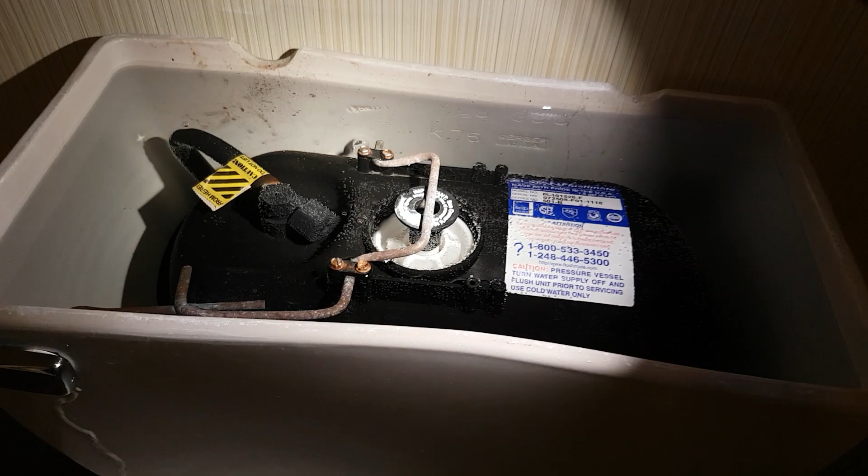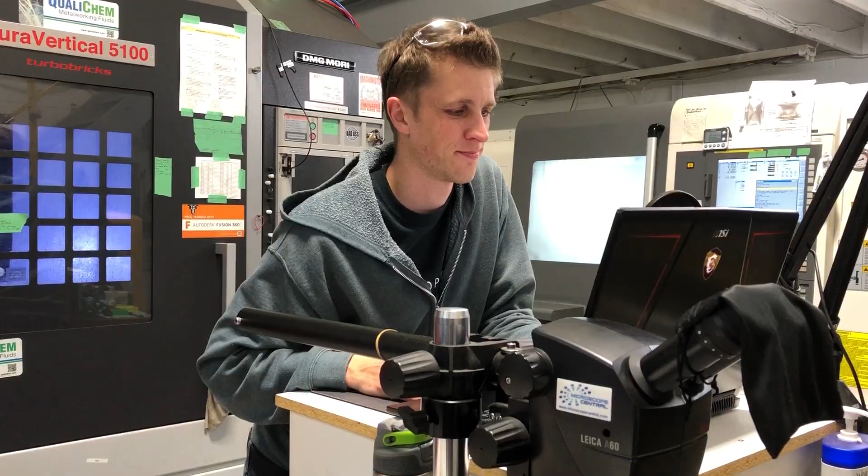So I know it's not my job, but for the next night, this is my toilet. And the ground is soaking wet and dripping. Check this out, I've never seen a tank quite like this. And look how full it is. Something's wrong. I don't get it. That's different. Now, I'm no toilet technician, but there is a towel in there. I did not fix it.

Good morning, everybody. It's cold, but actually really nice out here. It's pretty easy - you just gotta follow the crowd of young guys wearing hoodies.

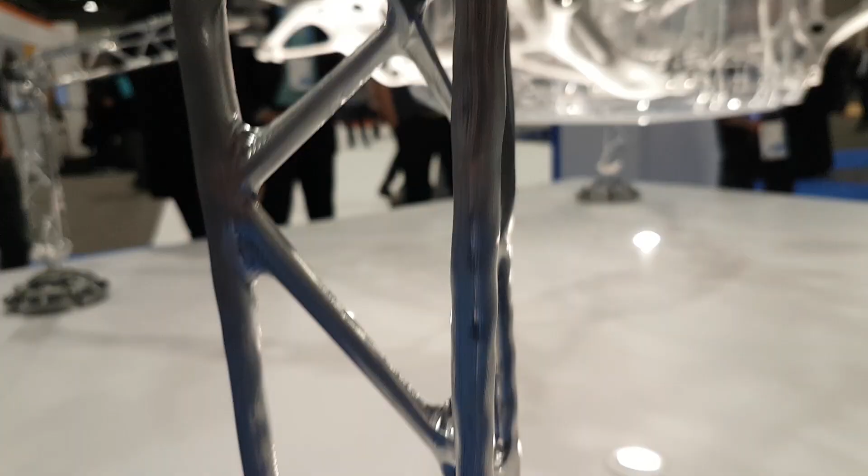I was just checking out the MSI computer booth because my laptop is an MSI, and I think I just found the microscope that Saunders has been talking about since IMTS. Let's go check it out. Weird. Nope, I think I was mistaken. This is like a 3D viewing system.

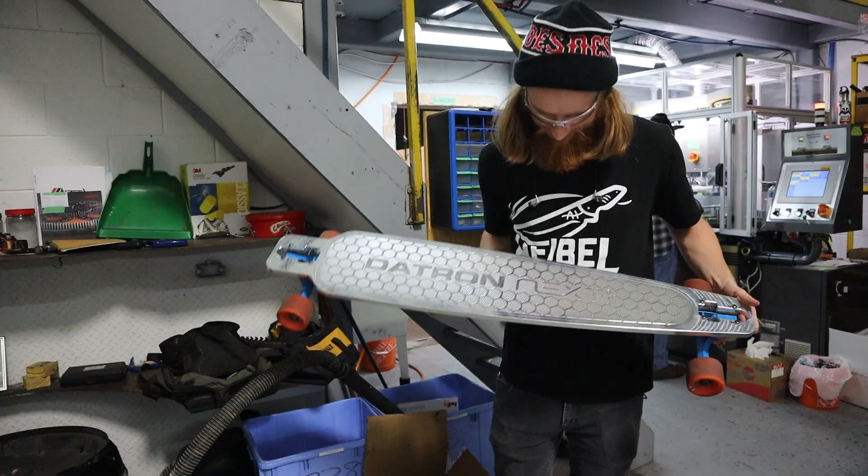So Dan was just at our shop like 3 weeks ago, delivered that sweet long board. I've never actually seen a Datron Neo in person, so let's check this thing out. All right, tell me what to do.

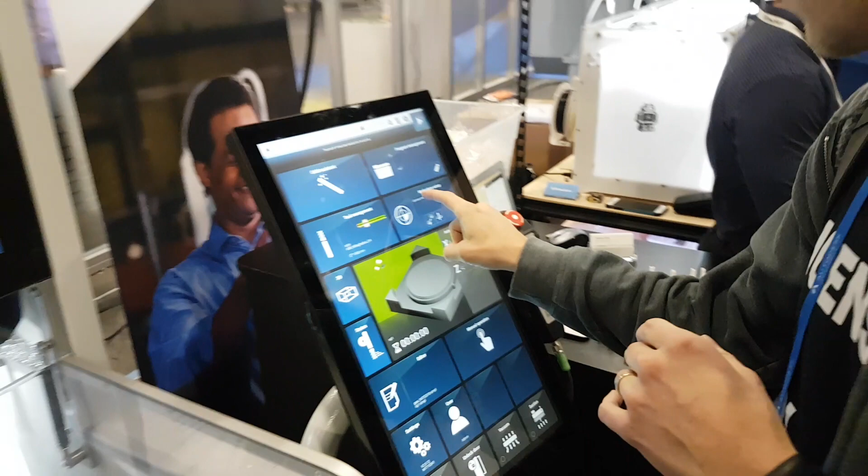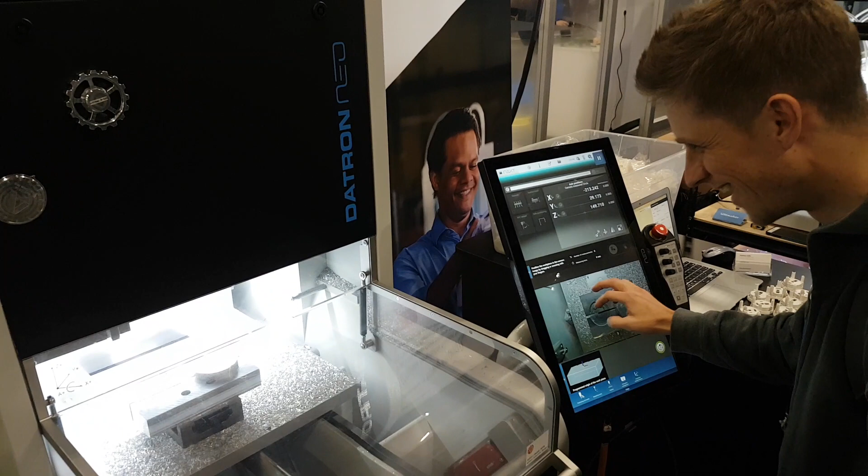All right, so we're gonna go ahead, go to workpiece setup. Yep, I've never done this before. Press right there in the center, drive Z-axis upwards. So we've got a camera on our Z-axis, so it's gonna raise it up to focal length. So I wanna find this piece of stock here on the side. You got it. All right, so the camera is beside the tool.

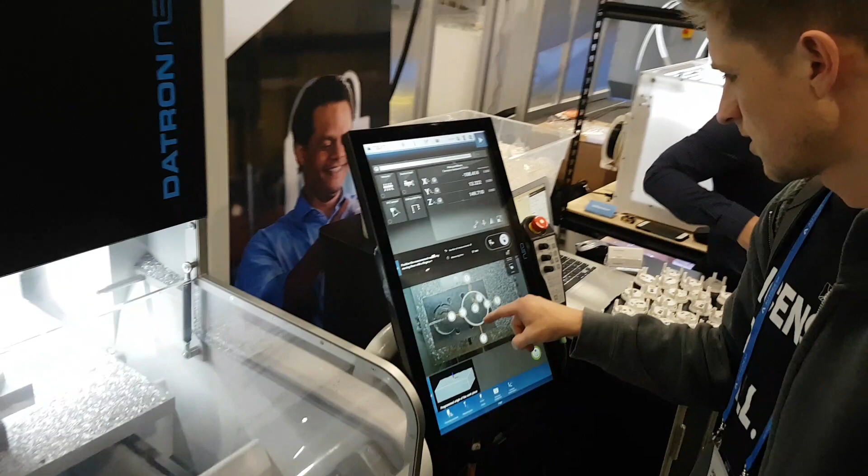Yep, so now we want to probe that. Go ahead and press draw in the upper right hand corner right there. This one here? Yep. And then just draw a circle around the part. Okay. And then you'll see all our probe points come up. Nice, it's perfect. So you drag them where you want them. If you wanted to do the inside of it, you could just drag these points in, out. You could add them, move them around, things like that.

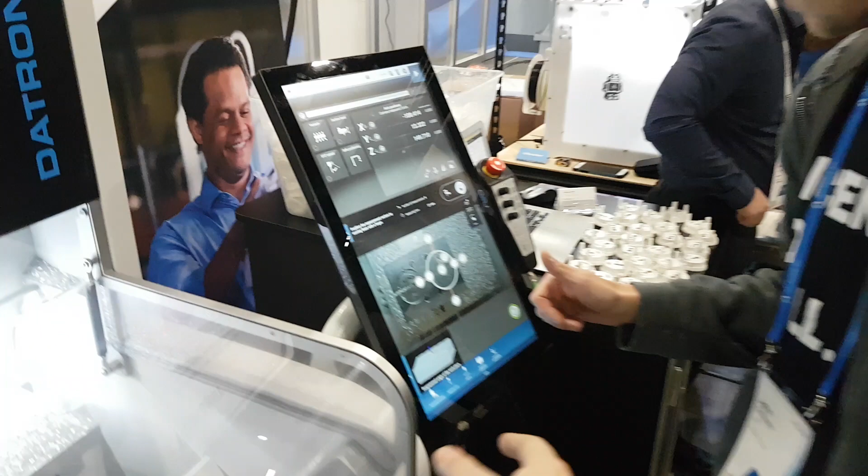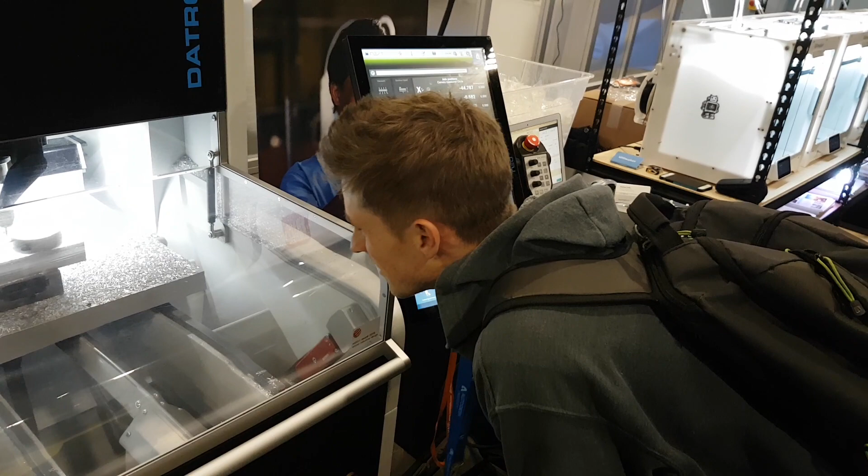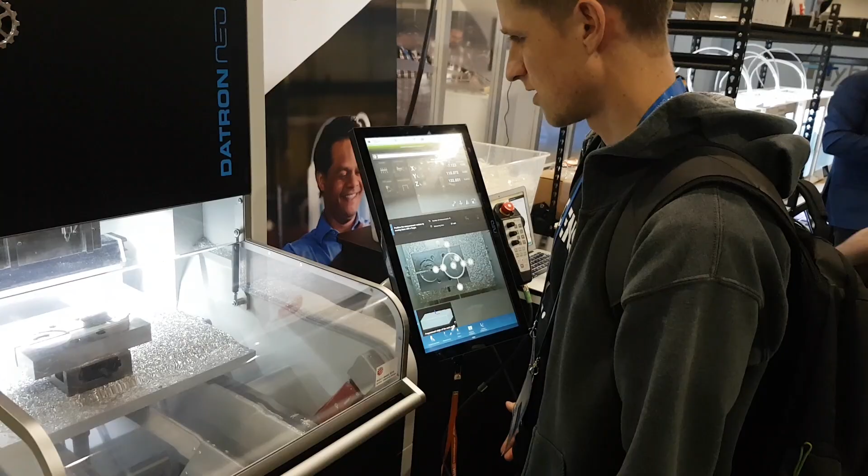Okay, and then if I click this one in the middle? That drags your center. Okay. And then that one point here is just for your Z height. So go ahead and press the green button. Probe comes down. Obviously, so finds your Z height, then it just goes around. Yep, you can customize all the points too if you're using all the pin stock distances. And then we're done. Touch off the tool. Oh, it's like a single flute, right? Correct.

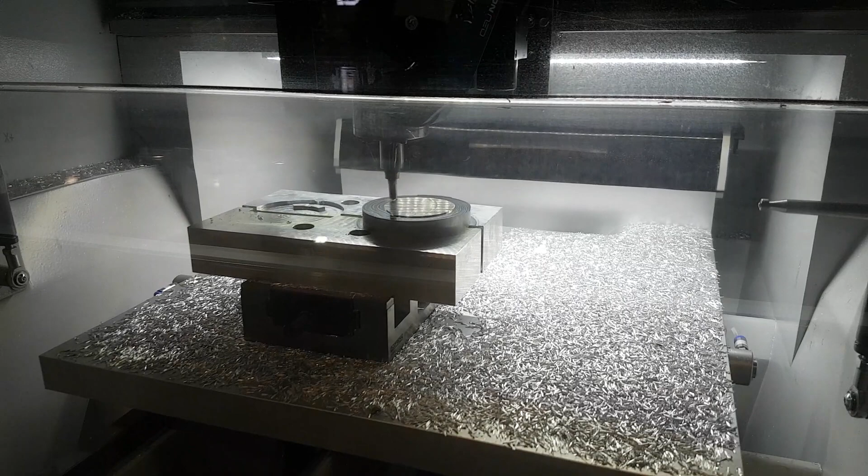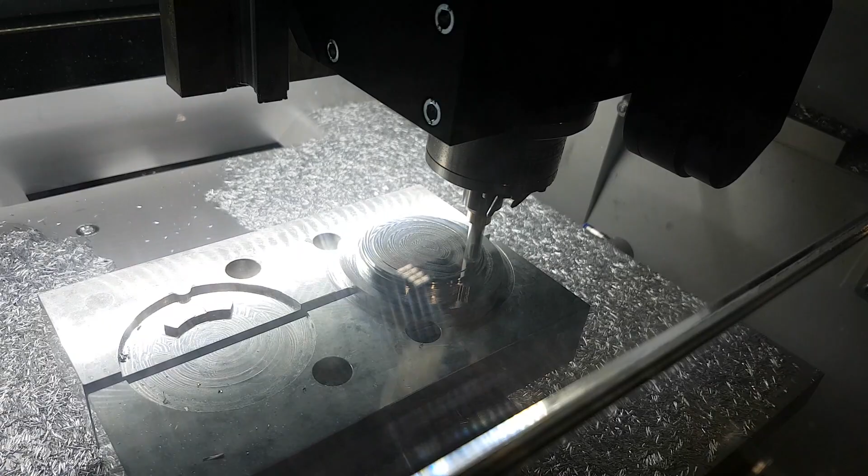Oh, so you just flip it over in the same position. Got a little pocket for soft jaws.

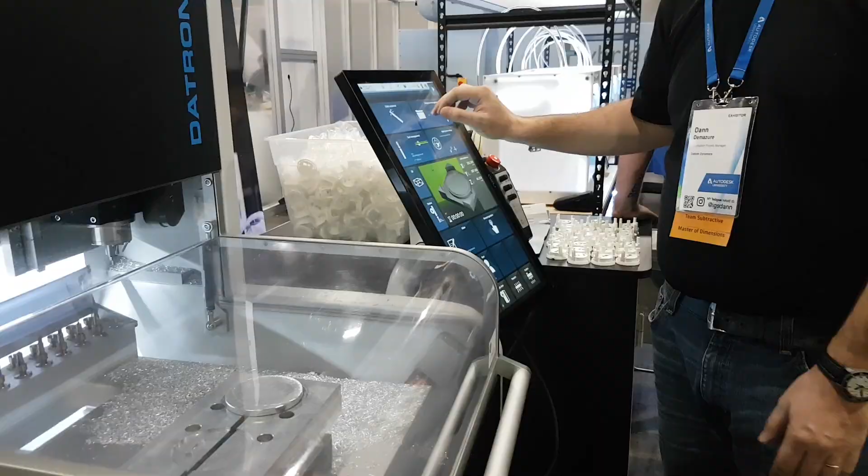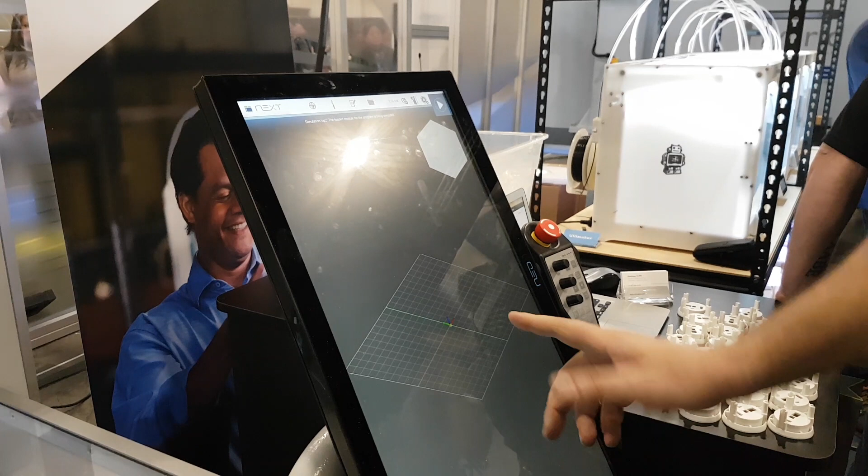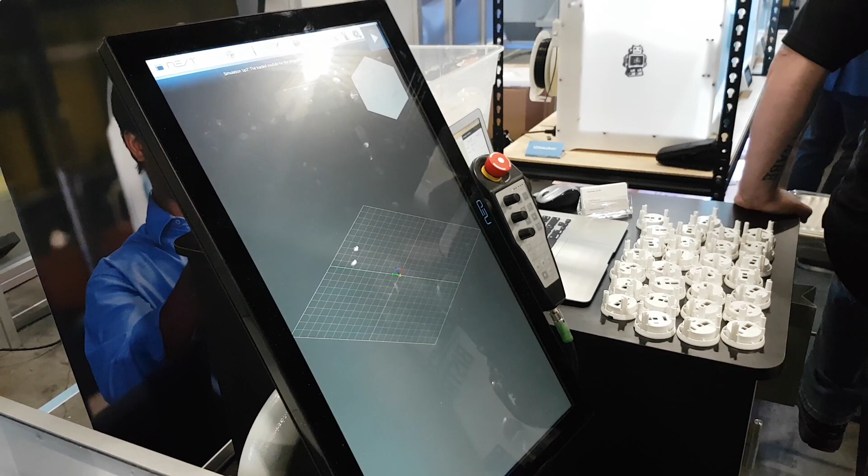Sure, so what's it doing? It's reading the code itself. Exactly - it doesn't carry anything over from Fusion other than what's in the post. Yeah, so just workpiece dimensions and tools. It's a representation of your toolpath, not your model. Yes, so if it's wrong, it's not your model that's wrong, it's something that's in the toolpath.

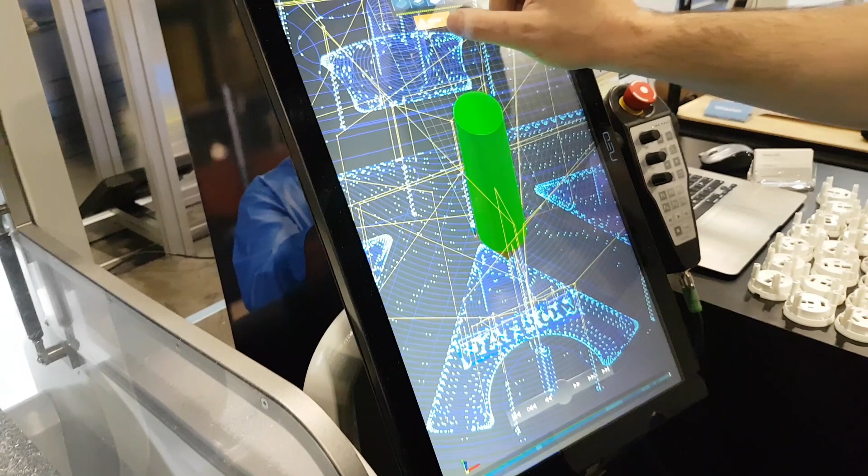So it gives us all the points, all the vectors. Cool, I've never seen this in stock on any other CNC machine.

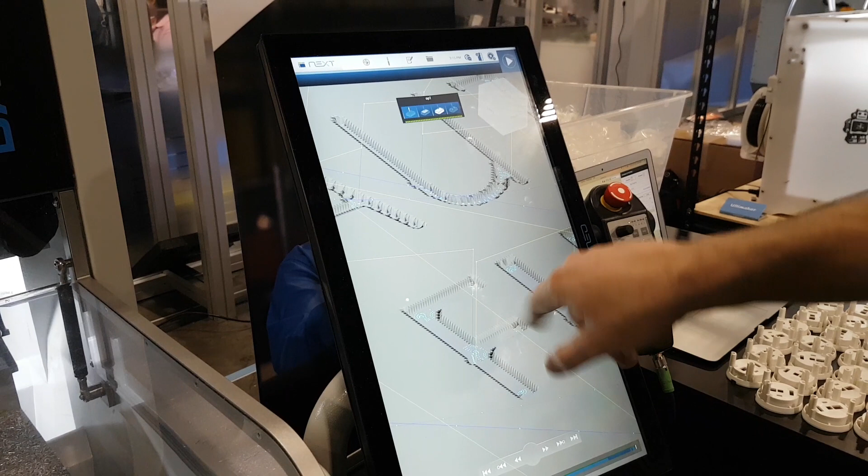Yeah, so we can zoom in, and the resolution gets better as you zoom in, so you can actually get some pretty good details. It will re-render, and look there, we can see from our engraver. There's actually on our M8 Cube or ML Cube, we have this control with 2 PCs, so it can simulate twice as fast and be at twice the quality.

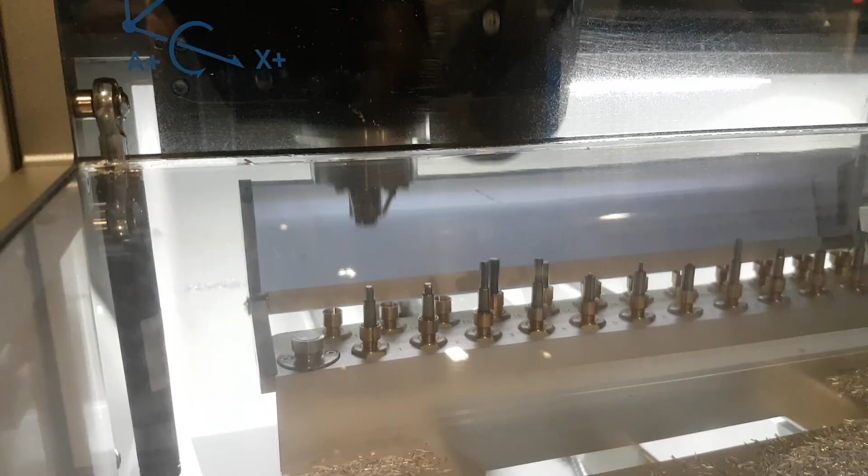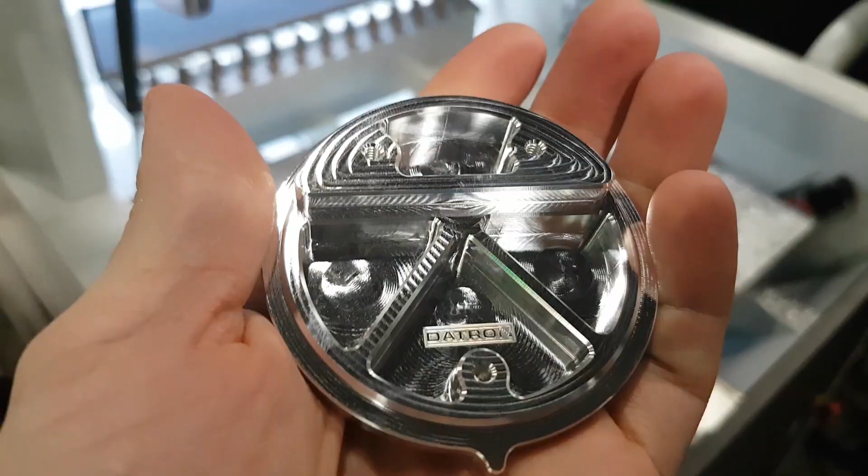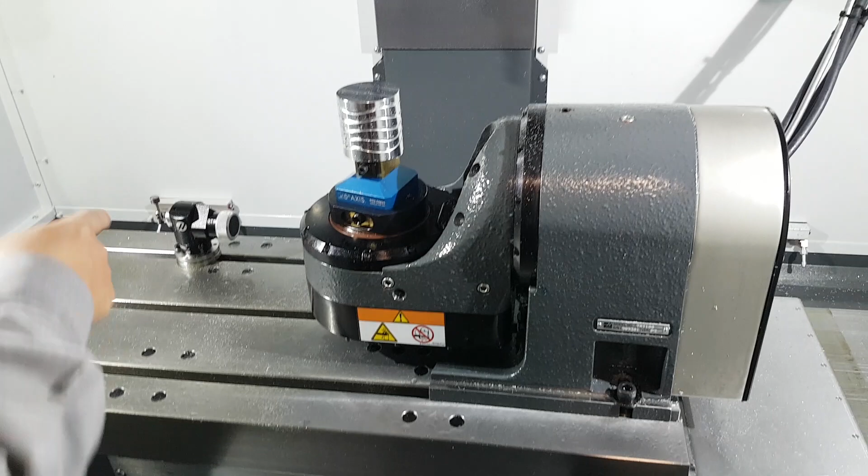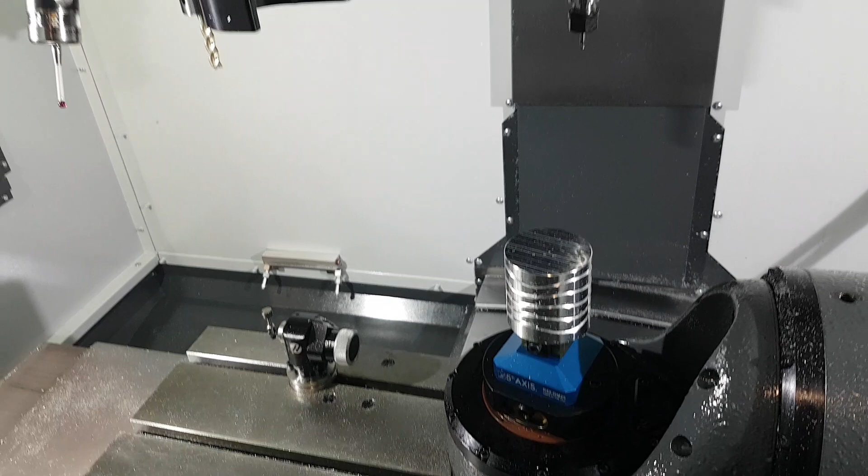Okay, so we got a Haas DM2. What are we looking at, what's new? This version of the DM has it washed out, single auger in the front like most of our machines, rather than the dual auger. It has the normal DM standard features, side mount tool chain. How many tools? 18 plus 1, so 19 tools, 12,000 RPM spindle, pretty fast. This one has the 5-axis, the TR200.

Very cool. Is it ID clamping that thing? No, this is OD clamping. It's on a dovetail or Raptor fixture, something like that.

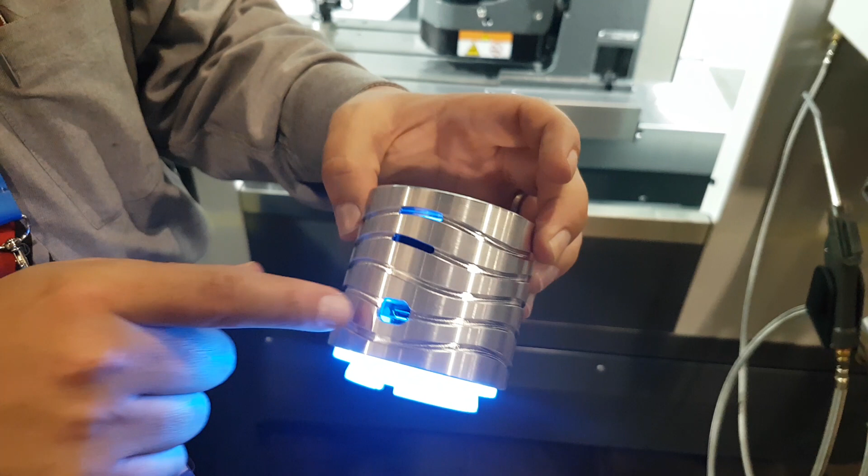Dovetail, sure. Okay, it's an air quality sensor, measuring some metric value, and that's the value right there. So it's actually pulling in air, and then it's USB chargeable. It has 2 modes, an air purifier mode or nightlight mode.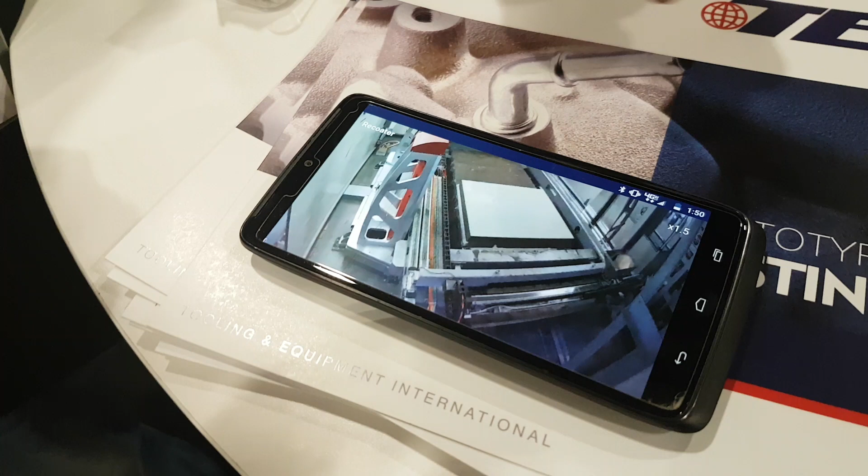All right, so we've got a live feed of the shop floor. This is the machine on the floor. Right now it's filling up the bin with sand. This arm's going to take off and lay a 300 micron layer of sand on the bed.

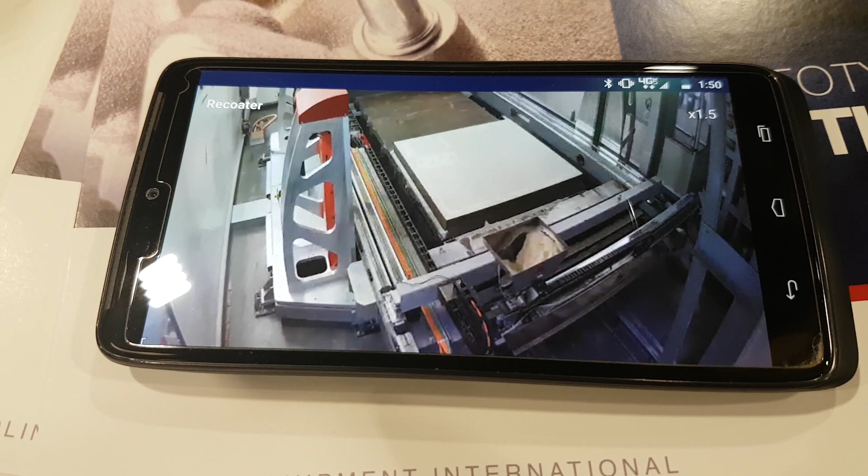And then a printer, an inkjet printer, is going to come by and shoot glue where we want glue. All right, so right there, that's the glue. Is it conventional sand like you would use in green sand casting? Yes, oh yes.

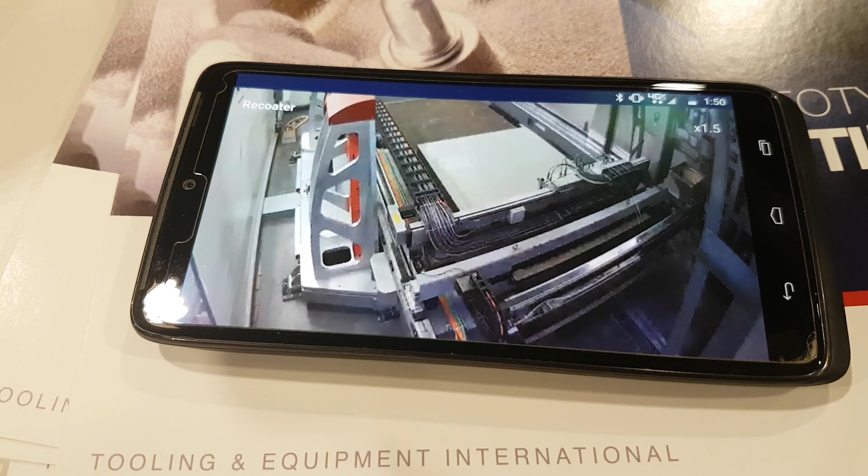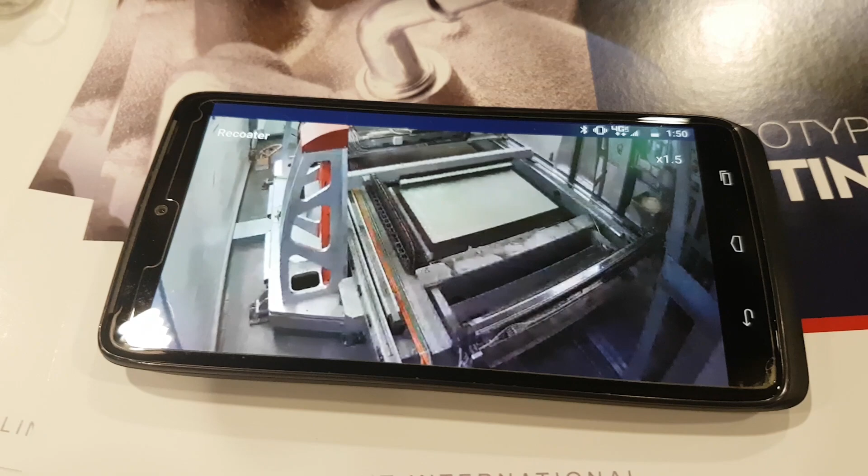It's beach sand. The glue is called binder, furan binder - same stuff they've been using in the casting industry. The machine was custom built - there's only 8 of them in the world. Two companies make printed sand machines: ExOne and Voxeljet. We've got a Voxeljet machine, one of the biggest in the world because sand's such a cheap media. You can buy a ton of sand for $100.

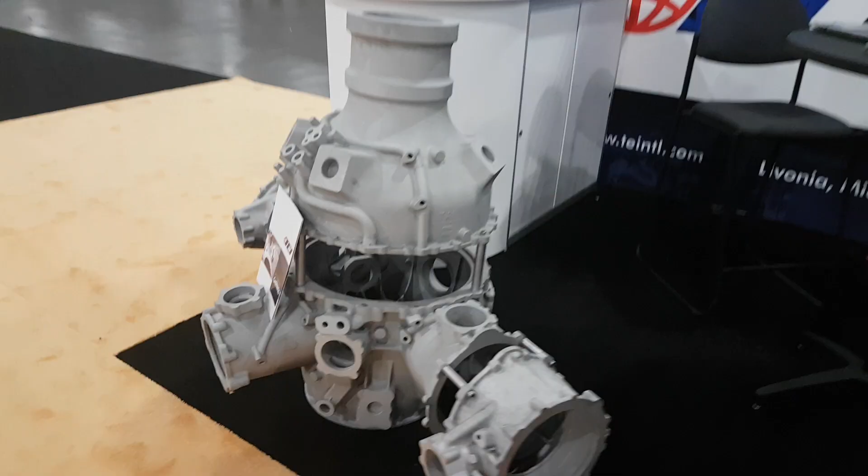The bed is 4 meters by 2 meters by a meter - that's the biggest print done so far. Check out this helicopter gearbox - it's printed as well. You don't think about it when you first see it, you're like, oh it's a casting. No, how did they make it? There's so much detail in there.

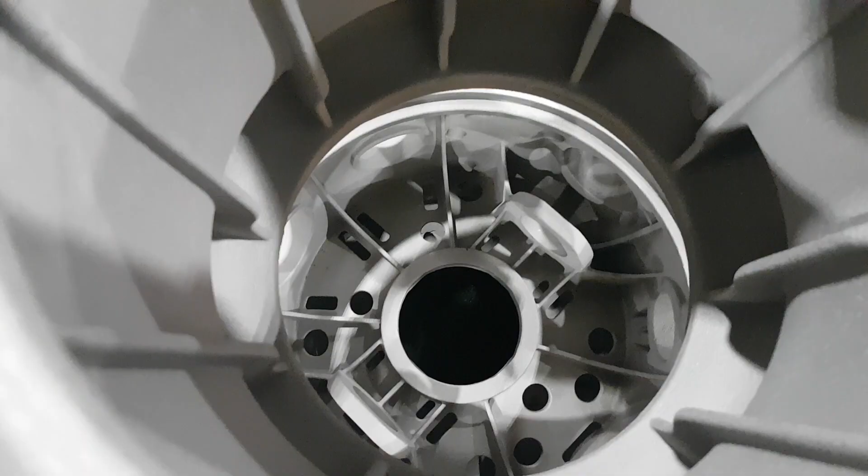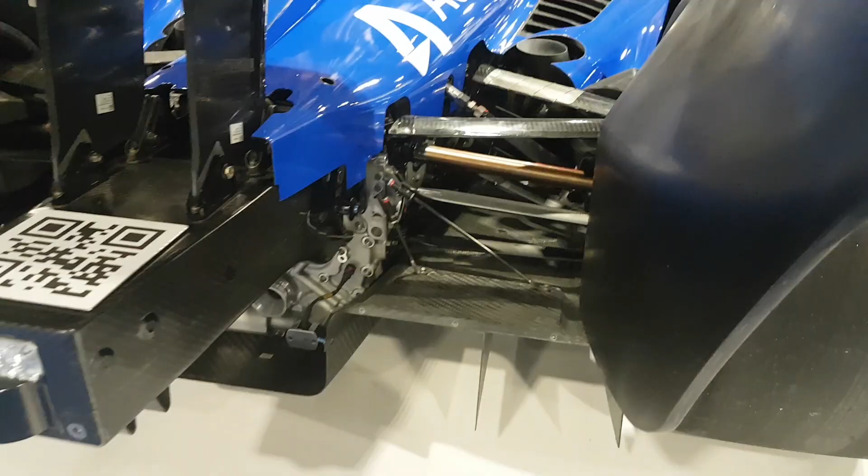There's carbon fiber everywhere.

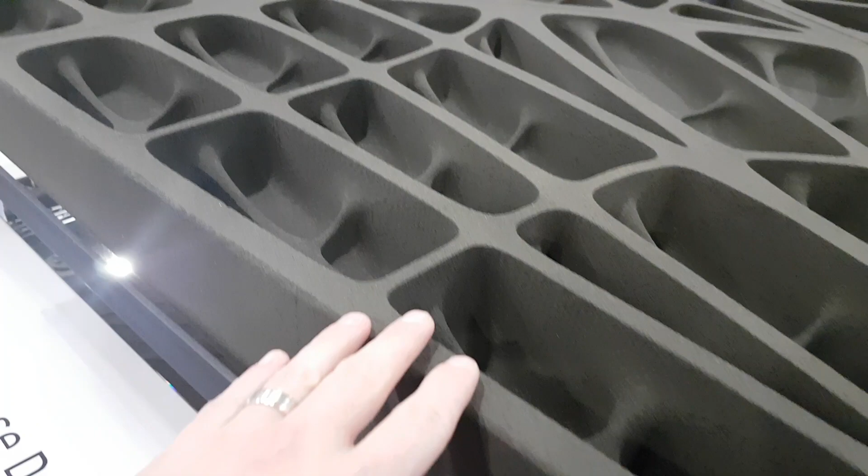Alright, it's only 4 o'clock local time. Classes are done for the day - I had some really good ones today. Just heading to my new hotel, Treasure Island, for the next couple nights. Then I'm going to meet up with Saunders and Rob and some other guys for dinner tonight. Changing hotels sucks because you got to carry your bag all day. Not a good idea.

Good morning everybody, John Grimsmo's guide to having an awesome day. Step 1, wake up at 5am, check. Step 2, do my workout, check. Have a shower, learn something. Now I'm working on my AU course which I'm teaching in about 45 minutes, so I gotta get going. Super excited to teach the class. I think I'm ready. All I want to do is provide the most value to these guys attending - inspire some people. All I want is 3 people to be like, oh I gotta do that, that's gonna be awesome, I can use that in my business. That's all I want, so I'm excited.

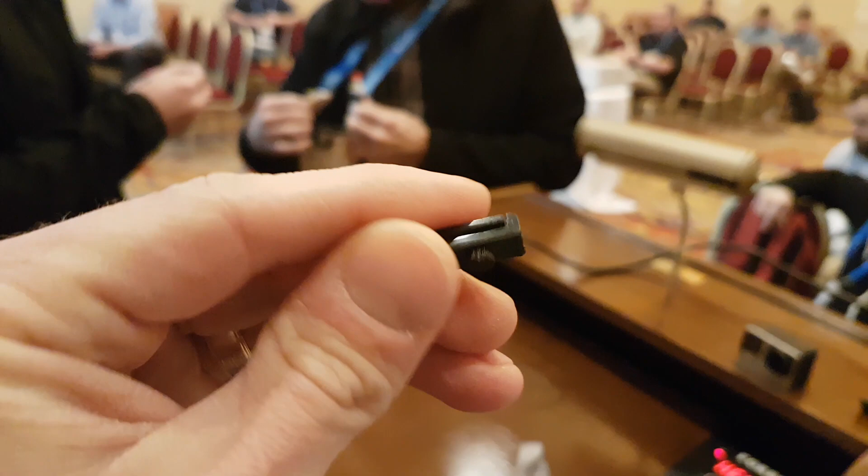This guy just handed me this 3D printed object, and I'm like, what is it? I dropped it - let's see. Nice.

So I've got a company called Grimsmo Knives. We make some of the coolest pocket knives in the world, and we absolutely love what we do. That's my brother-in-law's knife, and he's a paleontologist - he digs up dinosaurs with it. We've been doing this for 7 years. Now we've got the team plus one more. It started in my garage, just me by myself, wanting to make magic happen.

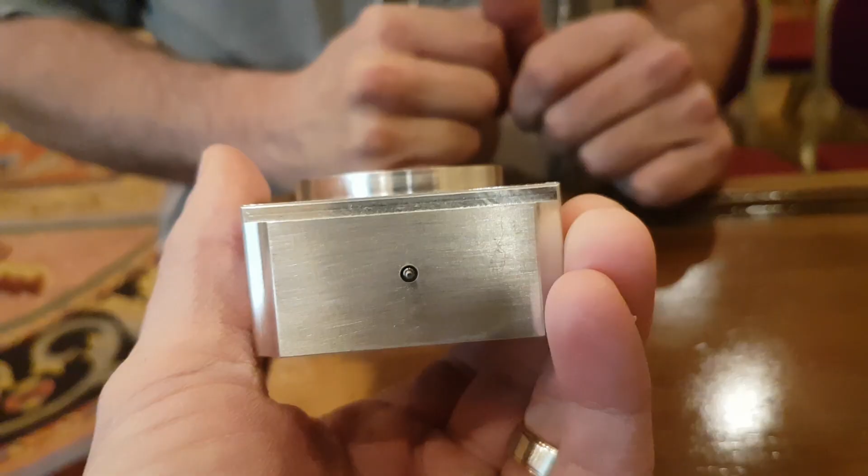We have commandeered one of the quiet rooms, and we're doing a podcast, Business of Machining, with our first guest ever. First guest? That's sweet. I know, big deal - well, you guys had a bunch at IMTS, and I was one of those.

Just finished that awesome podcast with Lockwood and Saunders. Just got it uploaded - Aaron's going to edit it at home and get it uploaded for tomorrow morning. Perfect. Going to Saunders' class on speeds and feeds right now, can't wait.

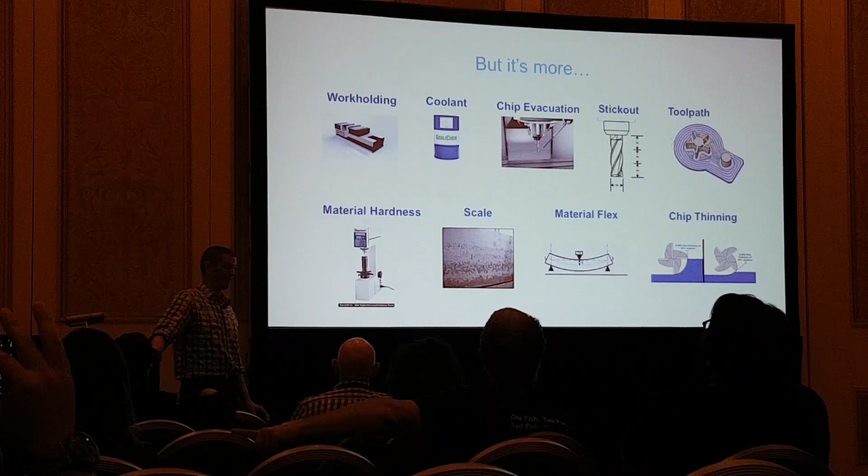I'm here with the man - explain your business, what's going on? So we are Carbide 3D, a desktop CNC manufacturing company. This guy right back here - yeah, those. We write our own software and make our own electronics. We make everything domestically also, which is pretty rad. And we are CNC nerds - my kind of people. We've just had this like 30-minute conversation, it was a long conversation. It was good, super deep, all about business and growth and challenges and things like that. So I'm like, I got to get you on film - this is great to talk about.

So, what else can you tell us? Who is your ideal customer? What do you like to sell to, and who do you like selling to? We sell really to anybody who wants to make stuff.

So this is everybody from artists to engineers to machinists. You're making it accessible. It is the most accessible CNC. Look at some of the stuff here.

What's the price on one of these guys? $2,500 gets you this, and that's ready to go. You can do full 3-axis milling, contouring, simultaneous 3-axis machining, and tight little detail stuff like the inlays on this guy. Very cool stuff.

I think the best part about it is it works the same way as a CNC machine, so you're not just learning how to use the Nomad, you're learning the whole workflow. I started on a machine not much bigger than this, my X2.

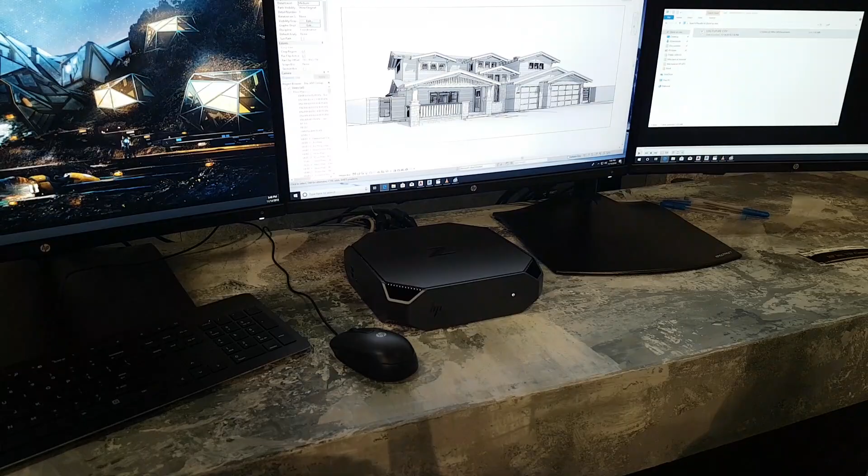So we're at HP checking out the Z2 Mini, driving all 6 monitors. Okay, explain it. So we've got a P1000 graphics card in here, you can do the 8700 CPU as well, so lots of frequency, which is great for your CAD apps because most of them aren't multi-threaded.

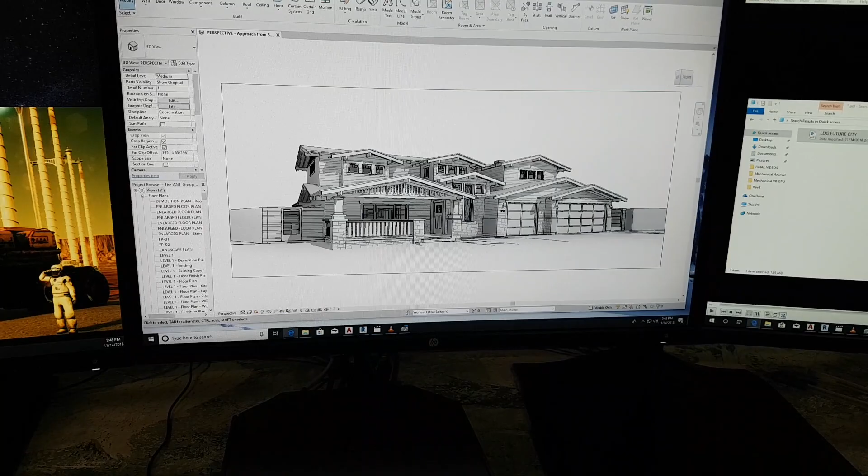I think that's the same - you said Fusion is what you're using? I don't think that's particularly multi-threaded. It does use many cores? Yeah, it does. So you could get a CPU where you get a little more cores out of there, Quadro graphics, and you can even bump it up to 32 gigs of memory.

It's podcast time, what are we doing? I thought this was supposed to be where the buffet was supposed to be.

I'm doing a podcast with Unprofessional Engineering. It's quite the fancy setup. Just had an awesome time, I need podcast fillers, these guys, oh, we could get a goodie bag. Cool t-shirt in here, check this out, look at this, look at this.

That was made on a Fusion-designed CNC machine. Geek made. I'm going to use this at home - I've actually been wanting a little valet tray for my stuff.

What are we doing? Go-kart, electric, yes.

So that concludes Autodesk University 2018. Back home in Toronto, it seems to have snowed, and I don't have a snow wiper thingy in my car right now. That's all right, what an amazing trip.